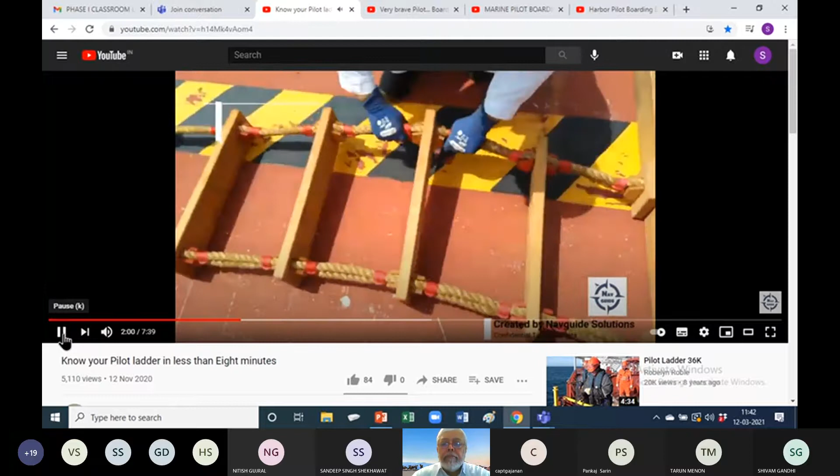Inspect the side ropes and the wedges. There should not be any missing wedges. The side rope should have a firm grip. Make sure it is in order. That's a bad example, should not be like that.

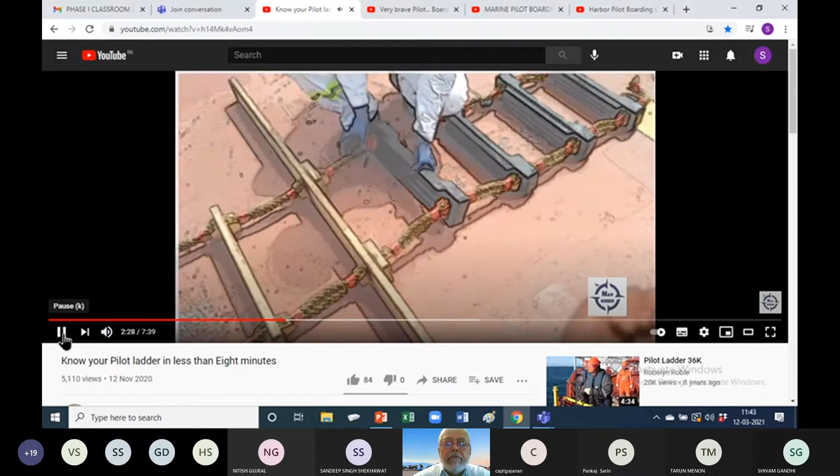Let's inspect the steps now. The steps should be clean. They should not be painted. They should all have a non-slip surface, including the rubber steps. Check the condition of the rubber steps, that they are not cracked. Once again, they should be clean, firmly fixed, and spacing should be even.

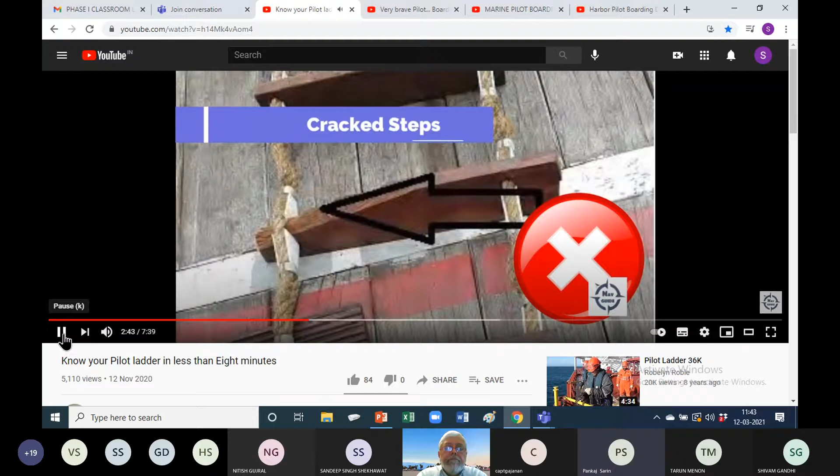Look at that, a broken and cracked step. Make sure you don't have that. That's a very shabby ladder which could come off at any point. Make sure that the side of the ladder is marked with heights along the length. There you can see 6 meters, 5 meters, 4 meters, and so on.

We're going to inspect the spreaders now. Check the condition of the spreaders. There should not be any cracks, they should be firmly fixed, and spacing should be even. Let me show you an example of a very badly fixed spreader that's really dangerous. This is the marking which relates your ladder to the certificate. It should be clearly marked.

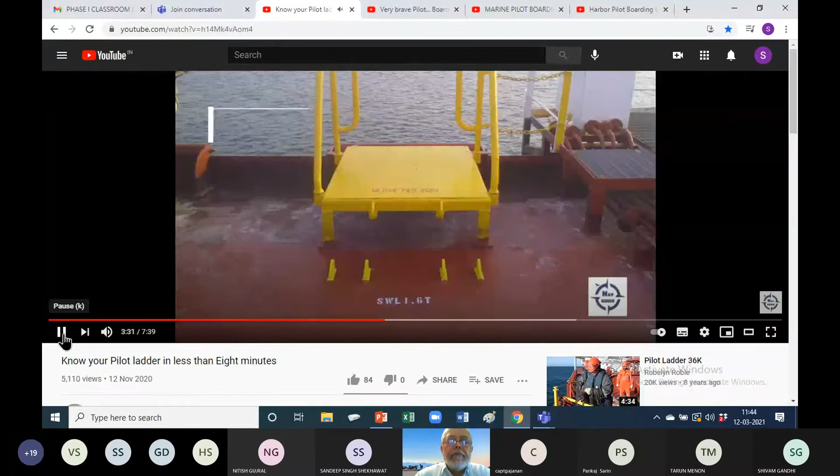The pad eyes on deck should be color coded with SWL, unlike this one which has no markings at all. The pilot access should be firmly marked on deck in clean condition. The duty officer must be checking this, unlike this one. The pilot ladder must be marked with tags for easy identification with your PMS. The length of the ladder should be enough to reach the water line in any condition.

Now that we have finished with the static checks, we are going to go for the rigging of the ladder. Let's rig it up. The rigging of the ladder must be done safely under supervision of a responsible officer.

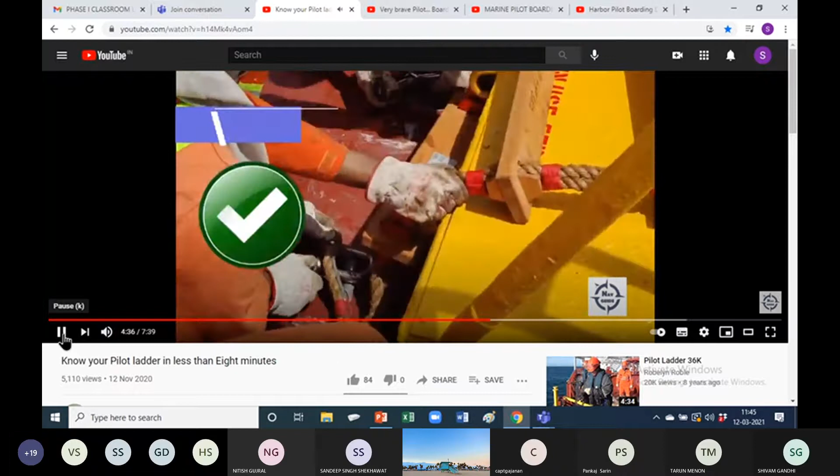The ladder must be made fast on deck firmly using the pad eyes on deck, using strong shackles. There should be a life buoy next to it with a line and a light, but the line should not be connected to the buoy. It should be firmly resting on the ship side with all the steps touching the ship side, and the area should be free of discharges.

Look at that ladder. It's a very poor rigging. None of the steps are touching the ship side.

If there is a tripping line, there's a right way to connect it. It should not be fastened to the bottom part of the ladder below the spreader. It should always be above the spreader level.

The illumination of the area should be adequate, which is usually provided by the deck lights, especially the searchlight on the bridge wings. People rigging should be wearing proper personal protective equipment, including safety harness, life jackets where necessary.

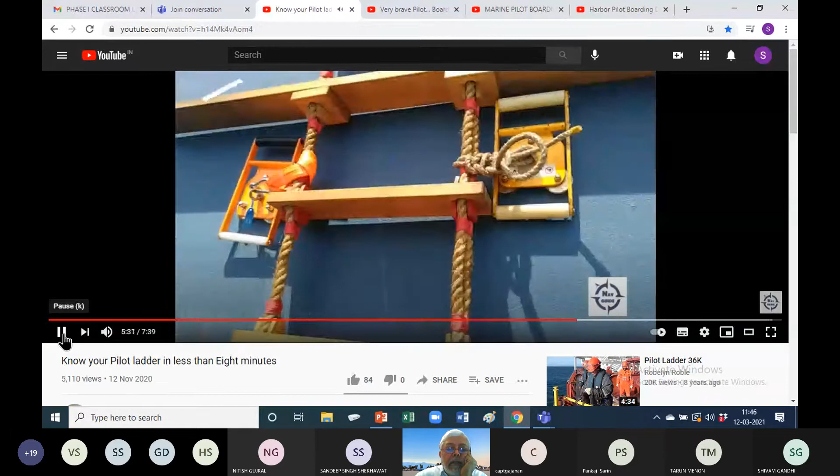The pilot ladder should be firmly fastened to the ship side. You can see there's a magnetic clip over here. There can be other systems to fasten it. That's a very, very wrongly rigged ladder that can come apart any moment.

Now, the height above the waterline must be suited to the pilot's requirements, and it should never be touching the water. The pilot access should be checked by the duty officer after rigging. There should be a safe access for the pilot to come up.

That's an example of a very, very unsafe access. It should not be this way. If you are connecting man ropes as required by the pilots, they should be between 28 to 32 mm Manila ropes only.

Let's go for rigging a combination ladder and see what are the precautions to be taken over there. Now, if the freeboard of the ship is more than 9 meters, a combination ladder must be used. A single pilot ladder should not be used.

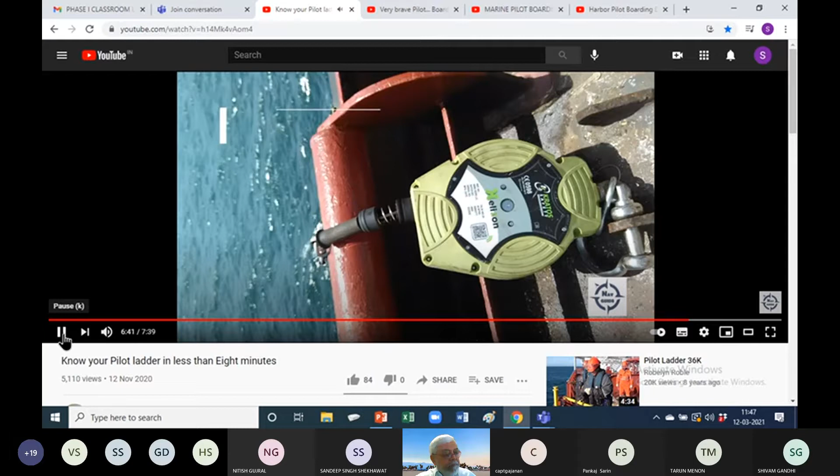Anyone who's involved in rigging of the combination ladder should always be wearing safety harness and life jackets. Proper PPE should be worn. Now, some ships are using a fall preventer device attached with a harness. This is extremely useful and increases the safety.

The pilot's climb is expected to be between 1.5 to 9 meters, not less than 1.5, not more than 9 meters, and the pilot must be escorted to the bridge when he arrives.

So now we'll carry on with a few dramatic videos. One is of a pilot boarding in the rough weather. See the skill and the timing and the danger.

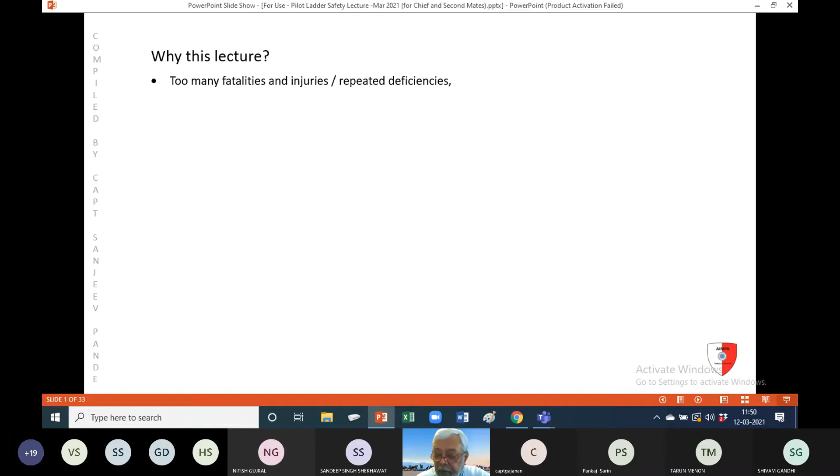So why this lecture? Too many fatalities, injuries, and repeated deficiencies. This isn't just me saying it. A proper survey by the International Maritime Pilots Association over the last 6 to 7 years found the percentage error rate of 20% is way too high.

Each of these errors is a potential fatality. Think of that pyramid of probabilities, where you start with lots and lots of near misses before finally reaching a fatality at the top. But unless you have the near misses, it doesn't start. So this 20% has to come way, way down. It must be wrong, and hence this lecture.

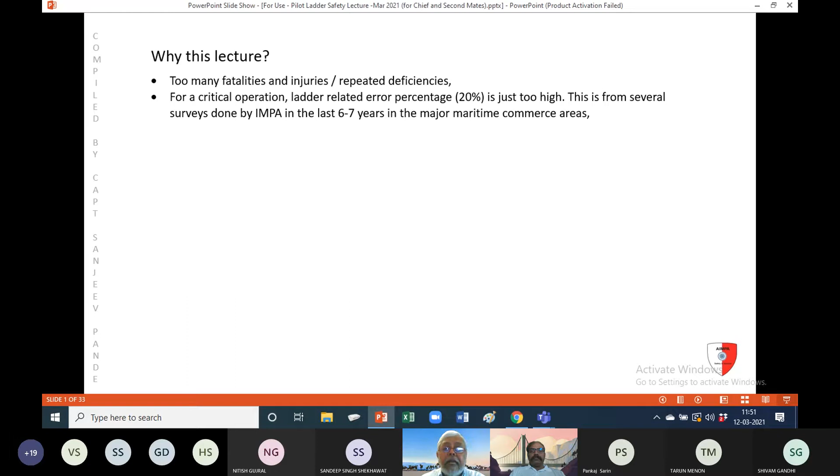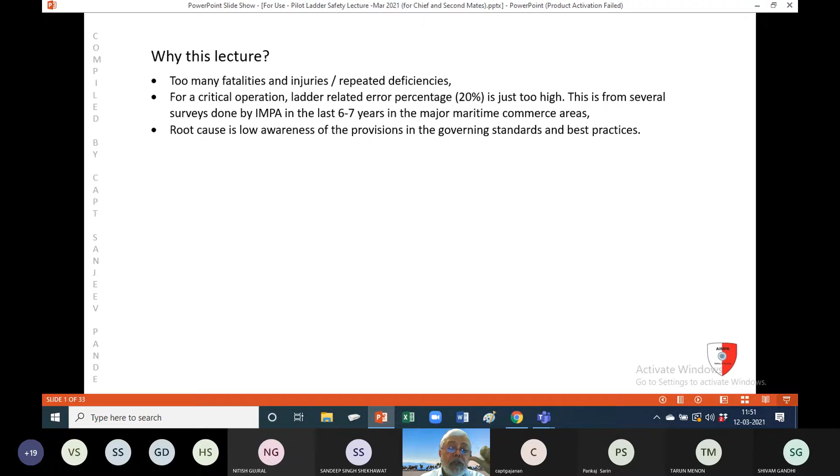Why does this deficiency occur? Because of lack of awareness of the provisions in the governing standards and of best practices. There are some good practices which pilots across the regions have developed, and the purpose of this lecture is to let you know what the best practice currently is.

So we won't talk much about specifications, rules and regulations. We will talk about practical things. First and most important, I feel, is that the ladder should be secured properly. Many methods are being used, creative methods, but only one of them is the good seamanlike method, and that's what we will emphasize in this lecture today.

Second, the ladder may be properly secured, but then it's rigged too low. The logic of seafarers is: if it's too long, we can always use the tripping line and heave it up so the pilot boat doesn't foul with it when it comes underneath. Then when the pilot is about to step on, we just ease the tripping line so he can get on the ladder and start coming up. This saves the bother of really checking and being careful about how long the ladder is.

Just send the bosun, he puts something out over the side and says, yeah, okay, how much? Over 3 meters? You were told 3 meters of water. Yes, yes, 3 meters. Nobody actually checked that, and that's where a lot of problems start. Towards the end of the lecture, I'll show you a video where you'll see exactly what I'm talking about.

People will also be surprised that there are a lot of injuries and mishaps when transferring from a pilot boat to a ship, or vice versa, when the freeboards involved are low, 1.5 meters climb or less. This becomes very tricky because small ships are also quite active and toss around in the waves, as is the pilot boat.

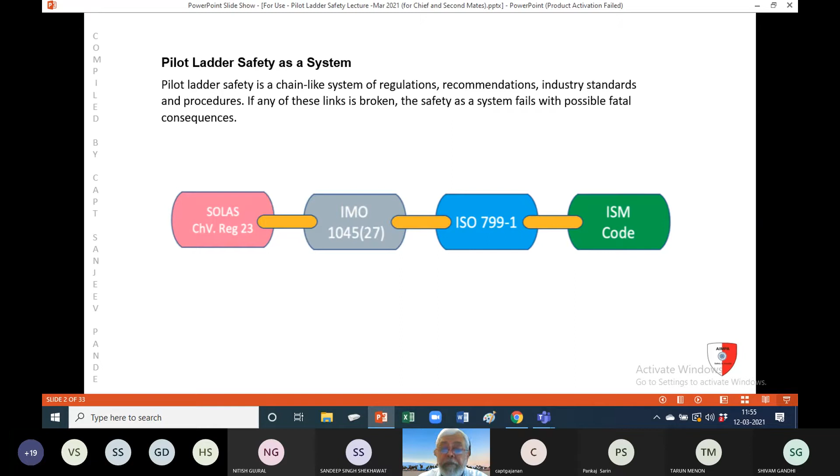So if any part of this is weakened, the system can fail. It's like a chain, as strong as its weakest link. All have to be good, all have to be well known. You must know the regulations, you must use ladders which are properly approved to ISO standard, and you must always follow the procedures and practices prescribed in the ISM code as per our ship's safety management system.

So let's start with the first part, securing the ladder. The pilot ladder specifications say that the top end of the ladder is to end in 2 thimble eyes, and those thimble eyes you attach to the ship's deck. There are strong points using good shackles, and then the rest of the ladder you pay out over the side, and that's it.

But that assumes that the height of the lower step in that kind of full length deployment would meet the requirements of the pilot. But that will be extremely rare and almost never. Most of the time, all the time in fact, you have to ensure that the lower step is at a certain height, suited for your ship's freeboard at the boarding position.

So what we call this length, which is not the full length of the ladder, is called the intermediate length. The regulations don't describe or specify how a ladder is to be secured so that at an intermediate length it is safe.

So intermediate length, just to clarify again, means adjusted length of the ladder so that it meets the desired height above the water of the lowermost step at the ship's current freeboard at the boarding position.

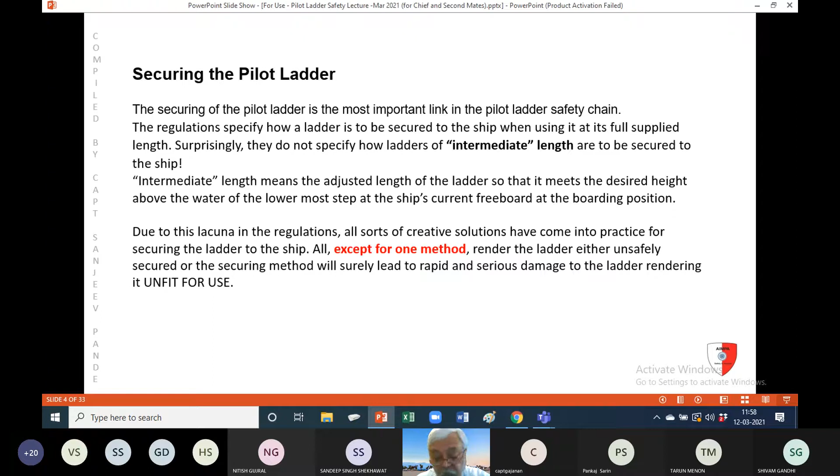And another thing you must bear in mind, because ladders have to be certified and provided by an approved manufacturer, you can no longer carry out repairs on board. They provide you 2 replacement steps, and those too are certified from the same supplier, in an approved manner in which they have to be fitted. And if you have more than 2 replacement steps, you cannot use the ladder. You have to get a new one, or get it repaired, or whatever.

So if you're securing ladders improperly, you will quickly damage them, and you'll quickly run out of ladders. And can you imagine telling the owners, or the charterers, or whoever, why I don't have a pilot ladder? Because I didn't rig it properly, it got damaged, and now I don't have one, send it please by helicopter.

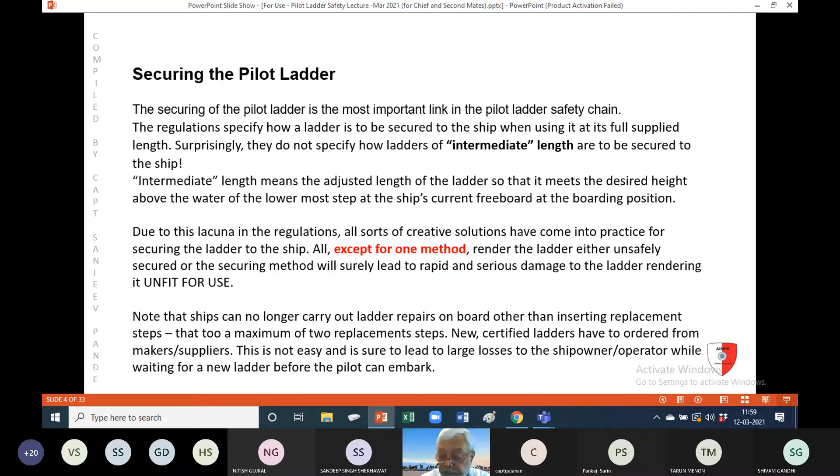So let's see what these bad practices are. One we're talking about is these tongues, they call them tongues, or some people call them brackets. This kind of bracket is a quick, handy thing. Quick, looks very nice, but this is not an approved thing. Some fitter has dug out his brains and done this practice, and it spread like wildfire all across a lot of ships all over the world.

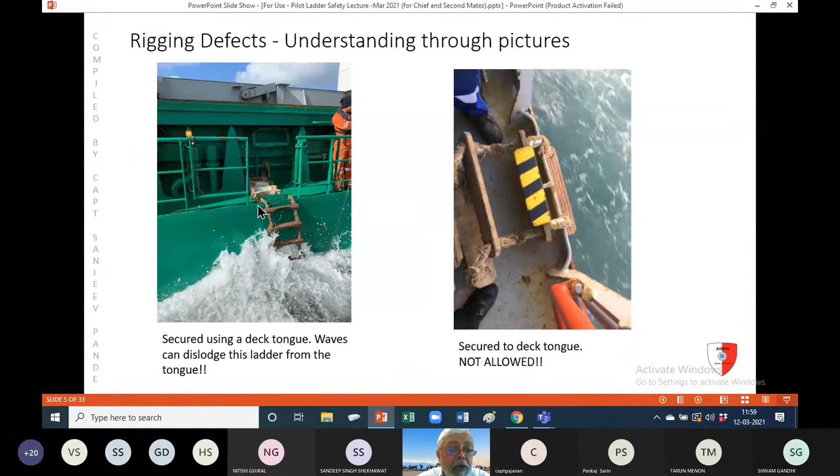So this is wrong. This puts the strain on the wooden step and onto the fixtures. This is not correct. It will damage the ladder. Here it is hooked on. One wave will come, it will take it off, unhook it, and next thing you know, there is nothing tying the ladder. It is not secure.

Here, the ladder is secured to the ship's railing. The railing is not a designated strong point, it is a weak structure. This is not right. Never secure to railings. Secure only to designated strong points.

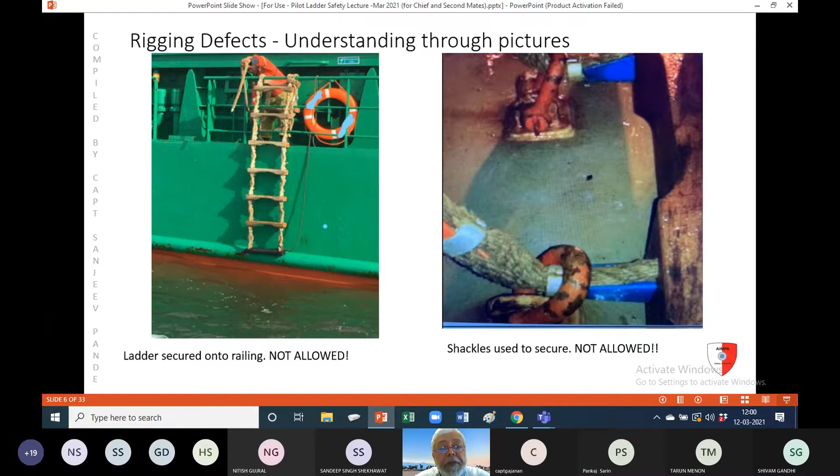Well, over here they use the strong point, but then they use shackles. Shackles are not good practice, not to be used, avoid. When you go on board your ship next time, if you see this being done, throw it out. You see, when the strain comes on the ladder, you'll find that it gets clamped and the rope will get damaged, and next time you won't be able to use the ladder. If you inspect it before every use, you'll find that a lot of damage has taken place.

Here we have another clever, extra smart way of securing the ladder, to provide a firm and flat footing for the pilot to step on when he comes on board. They got this collapsible platform.

But then they use the same thing to secure the ladder. See the next picture on the right. When the pilot said lift up this, he asked them to lift it up, and asked where the ladder is secured. It's just being jammed by the two drop nose pins, locking pins. That's all - the lid is put off, the locking pins put in, and the ladder is jammed underneath that. Not correct. Unsafe.

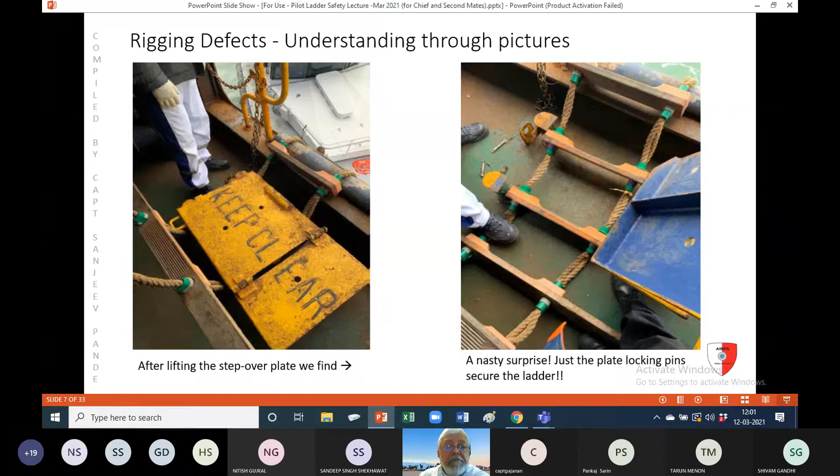Here, left hand side, they're using a crossbar. Again, the weight is coming on the step and the fixtures, not on the side ropes. Not safe, not allowed. Why? It will damage the ladder, and then you'll have a ladder which is not fit for use.

The right hand one is - well, they have jammed the spreader against the ship's railing, thinking that is enough. Obviously very wrong. As an extra measure they put 2 shackles, but that also is wrong.

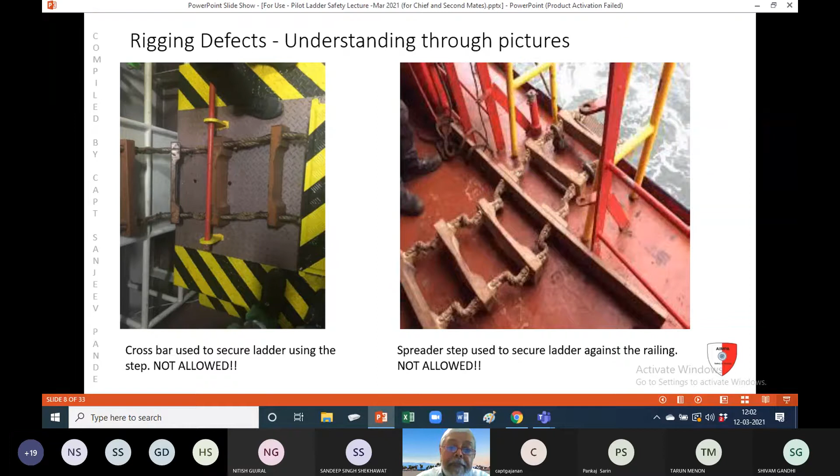So then what's the right way? The right way for securing ladder intermediate lengths is a very simple rolling hitch method. Based on best practice, it takes into consideration the fact that the design and construction of the ladder makes the side ropes the primary weight-bearing part. So you should understand that the side ropes are the ones supposed to take all the weight forces, because the side ropes are made of rope with a minimum breaking load of at least 24 kilonewtons, roughly 2.4 tons.

Whereas the steps with the fixtures - the chocks with seizing or clamps, whatever - are tested to a proof load of just 8.8 kilonewtons, about 900 kilos. The pilot doesn't weigh 900 kilos, he weighs 90 kilos, but there are impulse forces, hammer forces, jhatkas. So 900 kilos is applied just for safety. But that's not enough, that can cause damage. Where is 2.4 tons and where is 900 kg?

So the rolling hitch method secures to the ship's deck on strong points in such a way that all forces are transferred fully to the strongest part, that is the side ropes. In this way, the steps, spreaders, or chocks are never used to bear the weight force exerted, since they're not designed for this.

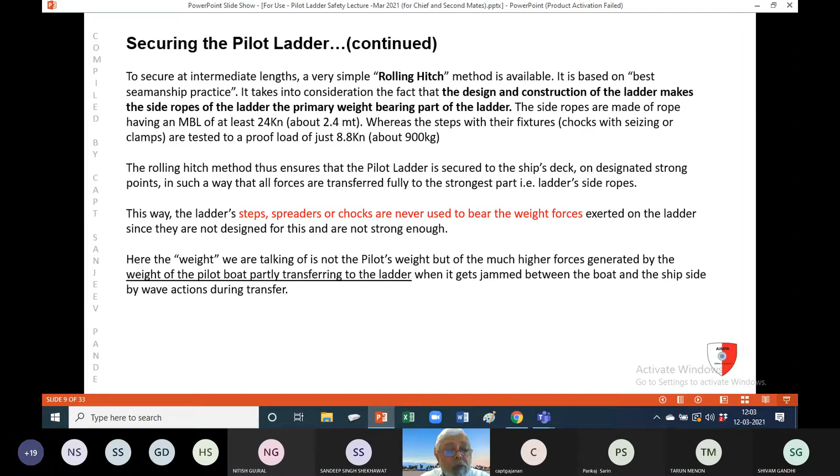And here, what do we mean by weight? Not the pilot's weight, which is hardly 90 kilos, but the much higher forces generated by the weight of the pilot boat, partly transferring to the ladder, when the ladder is jammed between the boat and the ship side in wave action. We'll see it in more clear terms with a few sketches.

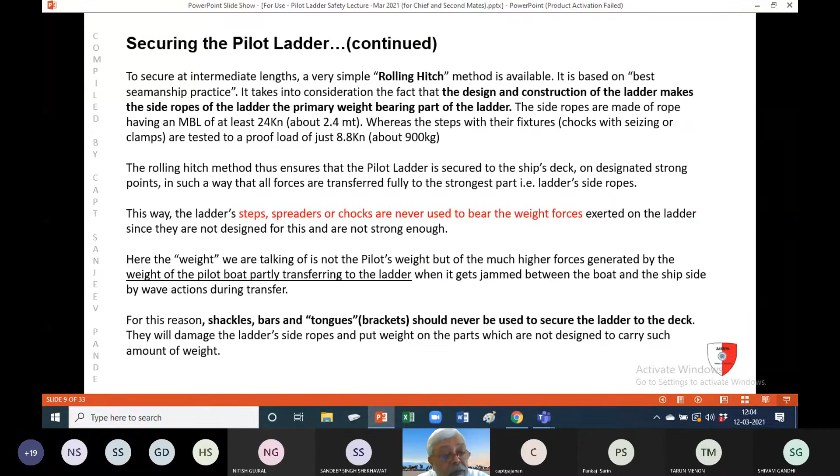That's why all the other methods like shackles, bars, tongues should never be used - they will damage your ladder. And when you have a damaged ladder, you're not supposed to deploy it. You're supposed to condemn it and put a new ladder from your stores, and answer your owners why you keep on buying ladders every 3 months.

Here is the rolling hitch method. I will show you a picture, but what is it? This is the best practice we are recommending: you have 2 dedicated strops of the same size of rope as the side ropes, MBL 24 kilonewtons. If you put them on shackles, also keep them dedicated, and your thimble eye is made. So it just becomes a matter of shackling those strops on one end to the deck at the designated points, and the other end you roll hitch onto the side ropes.

And when the ladder has been put in storage, so can these strops, and be saved from weather damage. You can have certificates to back them up - that's what is going to come very soon. Your ladder certified, and what about your securing ropes? They should not be the weak link, they should all be certified, so must the shackles, and so on. Paper trail is very important.

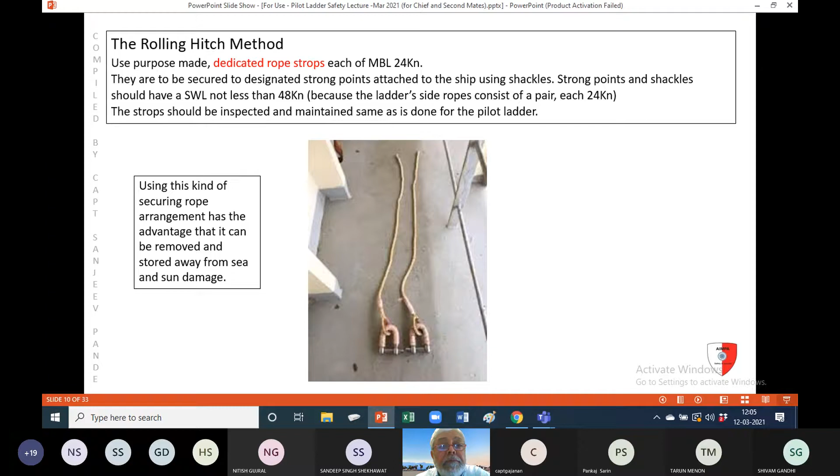Obviously, you must have them at equal length. Otherwise, if your securing rope is long and short, you'll have a slanted ladder. Not good. The steps have to be parallel and level.

Very simple to make the hitch. One, two, three, four, the steps are there. You learn it within half a minute. Practice, and within half a minute you know how to do it. Left hand, right hand, you'll know how to do it.

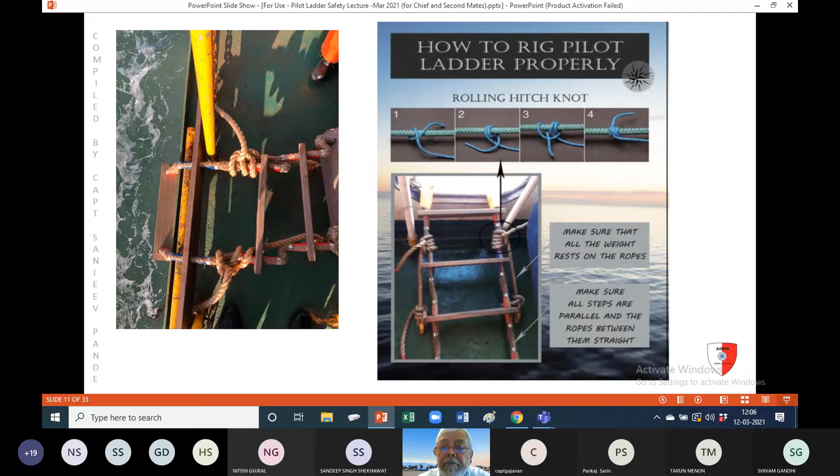So here we are going to talk about the next part, securing the ladder to the correct height. If it's a bit shorter, it's not an issue. The pilot doesn't actually use the lowermost step to step on. He uses the one above, or maybe one more further above that. Okay, mostly the one above.

And when the boat is up and down, jumping, he maybe uses the second one above. So if it's slightly short, doesn't matter. But if it's long, it can make problems. A little bit long maybe a problem, okay, but too long, it will cause lots of problems.

of the one jhatka of the pilot boat. You'll have one or two steps which are wrenched loose. And the next time the ladder won't be usable because you can't repair it on board. Those fixtures, this is no longer allowed. You cannot do the seizing, you cannot do clamping. You have to replace the ladder.

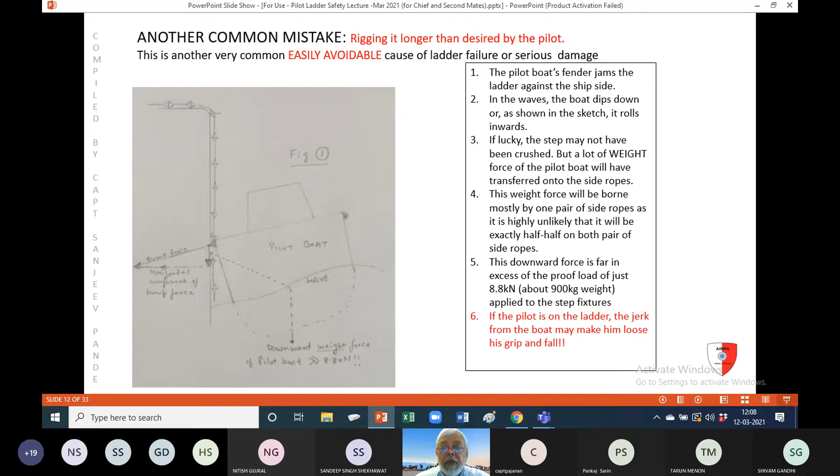The pilot may have climbed up, but then after that your ladder has become useless for further use very soon. If you're lucky, maybe a little bit, but if you do it very often, you're going to run out of ladders.

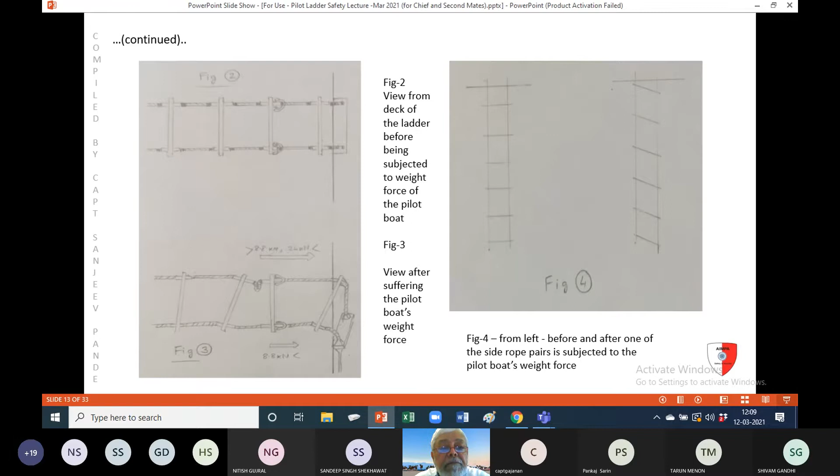12 meters height of access point above waterline. Height desired by the pilot is 4 meters above water. So the length of ladder deployed is 8 meters. From the ship side, at that point you measure downward 8 meters — that's where the lower step should end. Below that, you'll have a gap of 4 meters. If you make a calculated rigging, then you're right. Don't make a visual estimate, you'll always go wrong. Typically this has to be done by the officer.

The crew, if you're smart and you've taught them, you might show them once or twice, and if they've practiced they come up with good, proper results. You can check it, and then tell them they know how to do it. Otherwise, it's the responsible officer's duty to make the calculations and ensure it's at the correct length.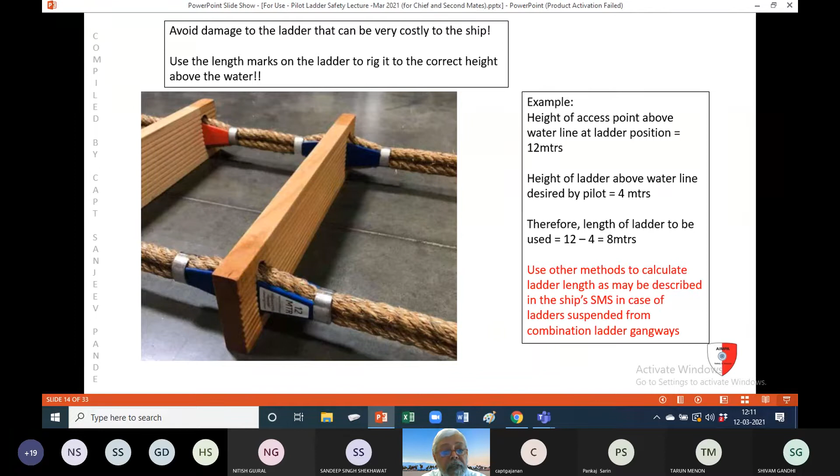Where's the pilot? Maybe in the water, we don't know.

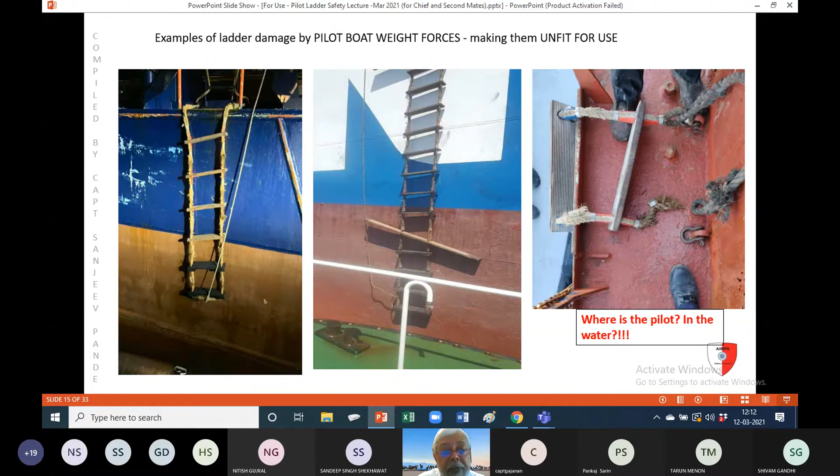Let's go on now to low freeboards. In this picture, there's an actual investigation into an incident where a pilot died, a London pilot. This is a launch — you can superimpose it on the ship from which he was stepping off after finishing his pilotage. You can see how there's just 800 millimeters clearance between the deck of the boat and the lip of the deck of the ship. 800 mm, that's about 2 feet, and that's quite a lot to jump off.

The pilot tried to do that, and he tripped and fell. What should have been done? The investigation found that the ladder shown on the right, the pilot ladder superimposed by animation, is how it should have been rigged.

With a bulwark ladder, of course, to step up, he has to climb up, and he has 2 stanchions to hold on to. While holding the stanchions, he steps down like a normal pilot ladder, until finally he watches the boat and times his jump and gets off. He doesn't just simply try to step off with nothing to hold. When you're stepping off with nothing to hold, your hands are free, your legs are free — basically you have no contact. Whereas the other way, you've got 3-point contact before you finally transfer from ship to boat, or vice versa.

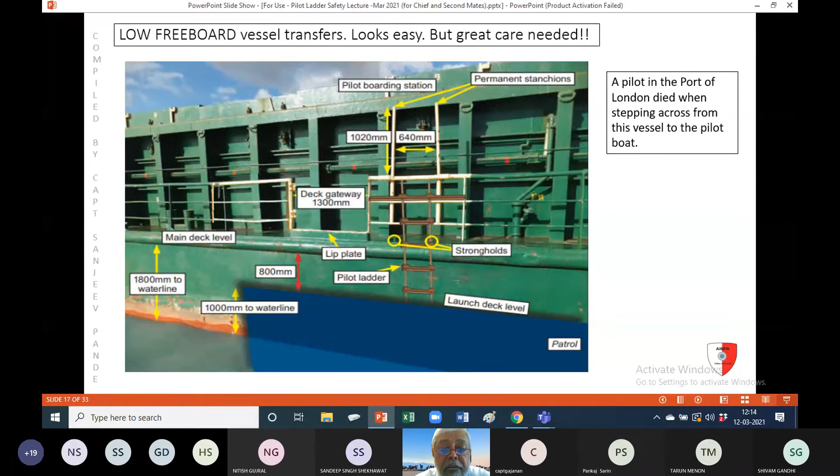Here's another case, low freeboard. It looks easy, what's happening, but I've done this many times and you'll find it's difficult. You've got no man ropes, nothing to keep your balance. Your arms are at your center of gravity, your hands, and it's very risky. You have to be a real supple, strong athlete to do this. Not good.

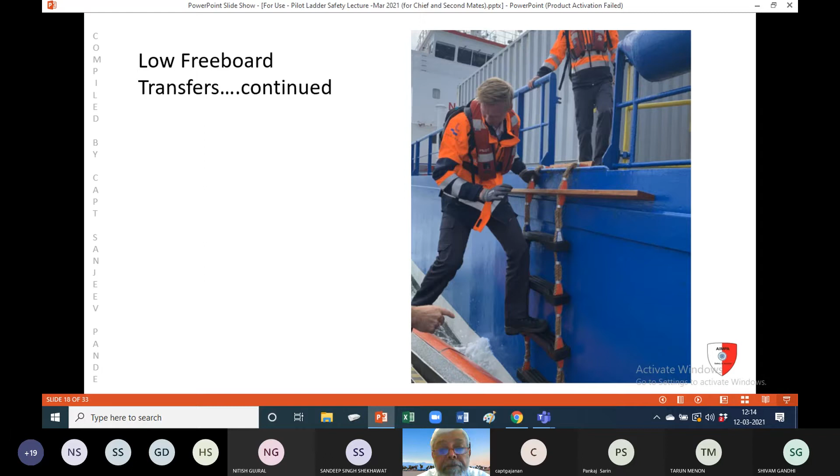There is no solution here, but you have to be careful. Now, before we go on to combination ladders, you must understand this height above water: the climb. Do we have to consider the climb, or something else?

Climbing is tiring, yes. But if you fall from a certain height, beyond a certain height, it's lethal. So it is the height of the fall, the expected fall, the maximum height from which the pilot can be expected to fall. That is the governing factor when deciding whether to rig a plain ladder or a combination ladder.

The table says even a fall from a height of 1 meter, by the time you hit the ground, you are at 16 kilometers per hour. The skull will crack even at that speed. Go further down to 9 meters height, and you reach 48 kilometers per hour. That's very high speed. Falling at that speed onto water is like landing on concrete. There's no difference between concrete and water.

So it is the fall, not the climb or the height of the access point, that matters. We will talk about this further in later slides, but it is the fall, the potential height from which you can fall, that governs combination ladders.

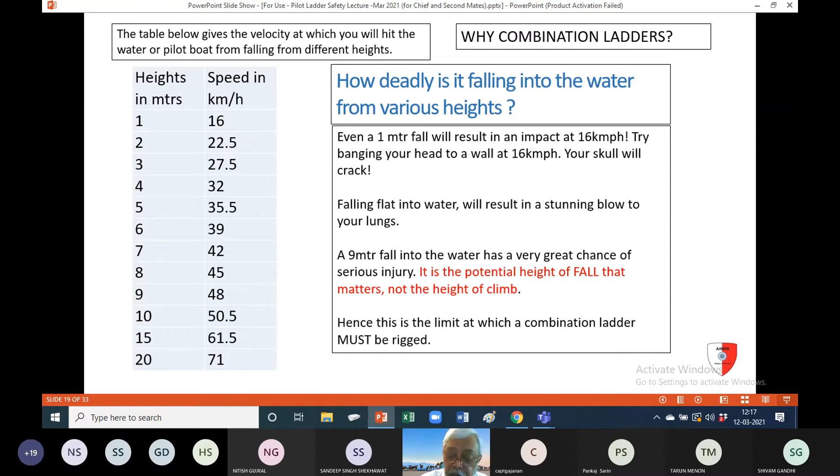So with the combination ladder, two things can happen when the ship rolls: the gangway part can swing away from the ship side and hammer back, and the pilot ladder can also swing like a rope and move around. Two independently moving things is very dangerous, so both have to be secured, not to each other.

There's a wrong practice that developed where people just lash the lower platform to the pilot ladder itself, thinking both are secured. No, that doesn't work. If they move together, is there no problem for the pilot? No, it's very dangerous. The whole contraption will move back and forth away from the ship side, and the pilot can get shaken off and fall.

So it has to be individually secured. The pilot ladder has to be secured to the ship side, and separately the lower platform also should be secured to the ship side.

The center picture shows good rigging except for the tripping line, which is leading aft. This is not correct; it should lead forward. Leading aft, when the pilot boat is approaching, something will get caught on the pilot boat. Leading forward, this danger is not there.

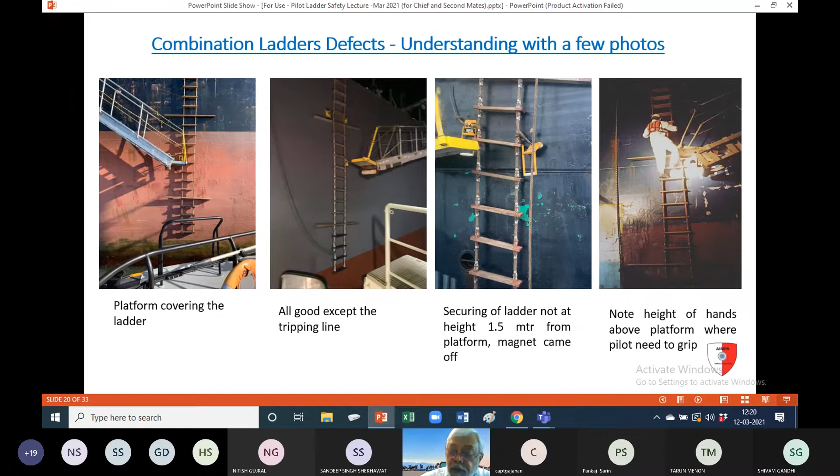Here they are shown using magnets. Some ships have special sockets designed, recessed into the ship, which are also good. In fact, in the third picture you can see there is one socket already, but that socket is not used because the draft or height of water is not suited for it. Here are some good examples, as per the IMO poster.

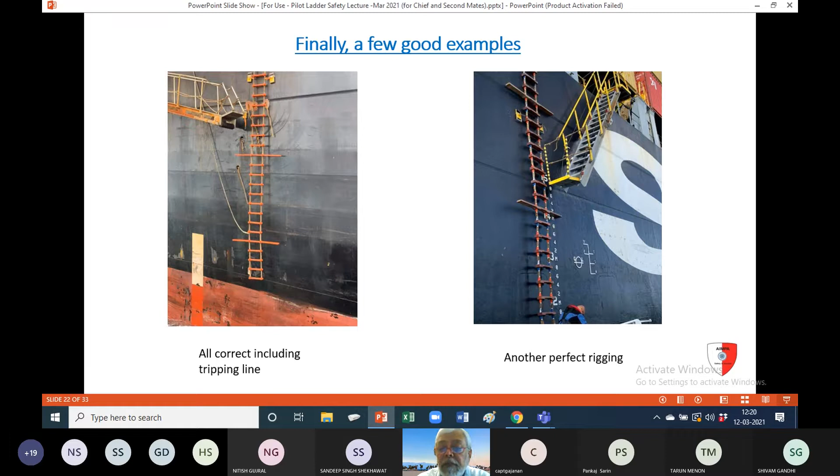The right hand picture shows the gangway looking very steep, but that might just be the aspect of the photograph. You must watch the inclinometer, as shown in the video. At 45 degrees, no, you cannot use it. You have to adjust the position of the pilot ladder by shifting it further aft so that the gangway can be hoisted more and the angle is less, below 45 degrees.

Then we have another thing about pilot ladder winch reels. Here the main consideration is the winch reel should not be bearing the weight of the ladder. It should be a strong point on the deck of the ship.

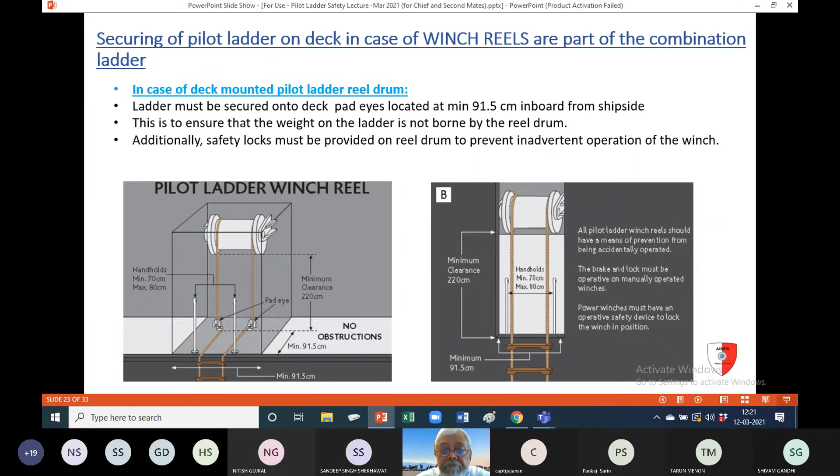Here in the picture, they secured the ladder directly to the ship's deck, but used shackles instead of the dedicated straps I showed earlier. In the right hand picture, they've just reeved the pilot ladder rope through one eye and it's gone straight to the winch. It's taut and the winch is taking the weight, which is wrong. Here also they should have put dedicated straps onto this strong point and applied rolling hitches.

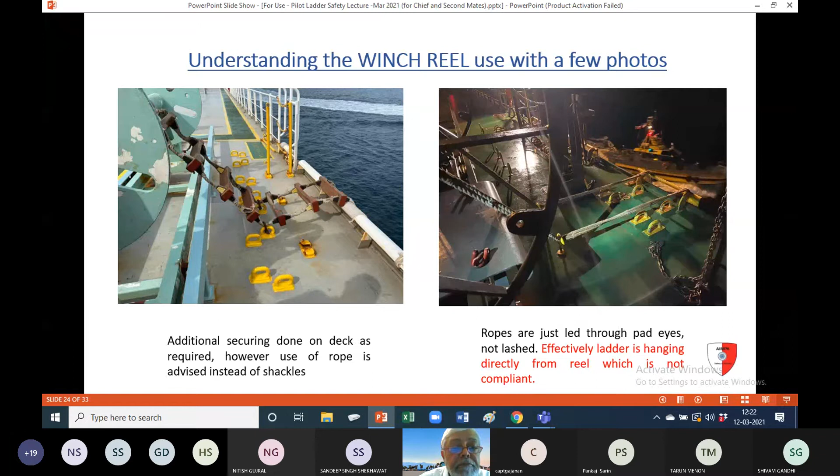We have another innovation called the hull door. Those are on very large ships, or ships where it's awkward to have a pilot ladder winch arrangement installed on deck, especially container ships, because deck space is a very precious cargo area and a lot of bays of containers can be used up for this kind of arrangement. So they make a hull door, which is very clean and neat for cargo storage on top. Large freeboard ships, like car carriers, also have this hull door arrangement.

Same thing, like on the right hand side, they have a winch, but the ladder must be secured to the deck and no weight should come onto the winch. Whatever winch you're using, remember these winches can be prone to being misused at the wrong time through inadvertent use, so they have to be safety locked. Power winches especially have to be engaged or safety locked. Even mechanical winches used to have extra locking, and bottle screws or turnbuckles are used to lash it.

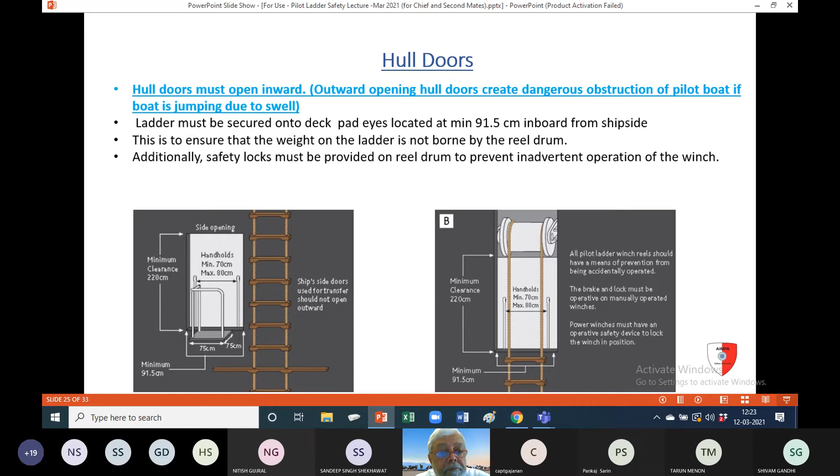Here is a photograph of such an arrangement. It looks fine, except that the pilot ladder needs to be secured to the ship's side. Otherwise it rolls around, hangs out, and swings in the rolling, and they have secured it only on one side rope, which is not good. As the pilot comes up and tries to cross over to the platform, the ladder is going to twist, and he can have a tough time getting on board.

Whenever these extra complications arise, that is where a mishap can occur. It should be one smooth climb, hand over hand, quickly up. It's something like trying to use a staircase - if one step is uneven, people trip and fall over that. If one part is twisting, one step is slanting, something is thick, something is slippery, all these complications make the pilot very careful and gingerly. That means great danger.

So there's a question here: how will you calculate the length of the ladder to be deployed in this arrangement? Freeboard is measured from where? Do you take it from the deck above, or from the deck of the door? These ships can be very, very high, and even the door can go very high, so what do you do? And when loaded, the door can be too low, very close to the water level. Very complicated. Then they make these innovations but don't think it through, and you end up with a lot of difficulties. They say someone will manage - no, it should not be that way.

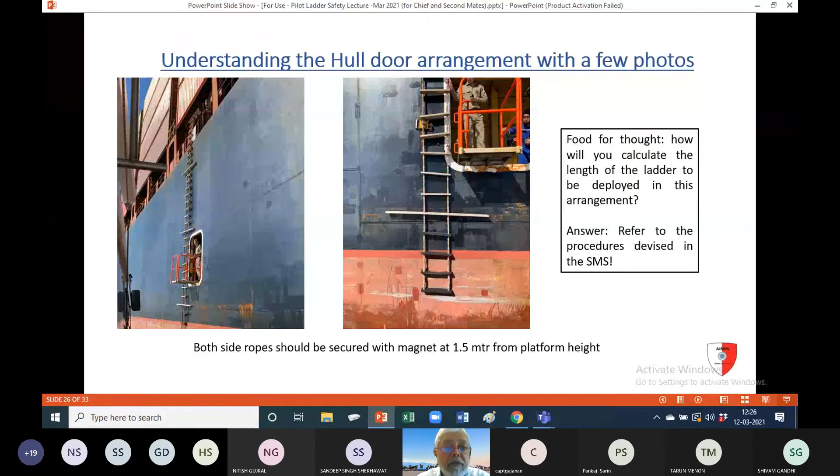Trapdoors - the word trapdoor really means you're trapped at a certain stage. Neither can you go down, you have to go up only and take your chances.

Essentially, what happens is the pilot climbs up, and then from using the grip on the side ropes, he has to shift his grip through some sort of metal angle bar. You can see it's very thick - how can you get your hand hold on to this? No hand can grip such a large thing. Then you have a horizontal pipe here and here. These are very slippery and round, and they don't give good grip. If you hang on the horizontal bar you have no strength, but hang on to a rope and you get tremendous grip. Try it - hang on to a rope this way and hang on to a bar that way, and see how much weight you can bear. Your fingers will just slip over this bar. So this is the problem.

The solution should be that the ladder continues further up for a certain distance, and then the pilot should be able to go, like they've shown here. They made a U-shaped frame, and the ladder hangs on to that. So here you can climb up and continue gripping the ladder. So the pilot is smiling.

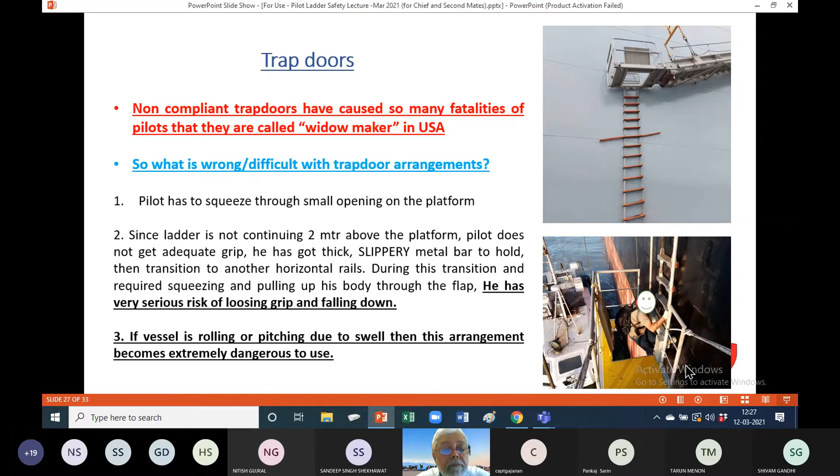Another good arrangement here - same thing from a different view. A nice U-frame: he climbs up, gets a pilot ladder to grip, and goes on board. In more detail, as you can see from the lower platform, at 1.5 meters on this side, they secure the ladder. Very nice.

But some ships don't have this kind of design, so they have to alter it. There are 2012 amendments - SOLAS has come in from 2012 with a cutoff date by which they have to make these changes, at the next survey or special survey, whatever repairs are needed. It's quite complicated, who does what and by when, but trapdoors have to be made this way, and defective ones have to be changed to this. So if you find a ship having defective trapdoors, you as chief officer should raise a defect item on the defect list and get it repaired.

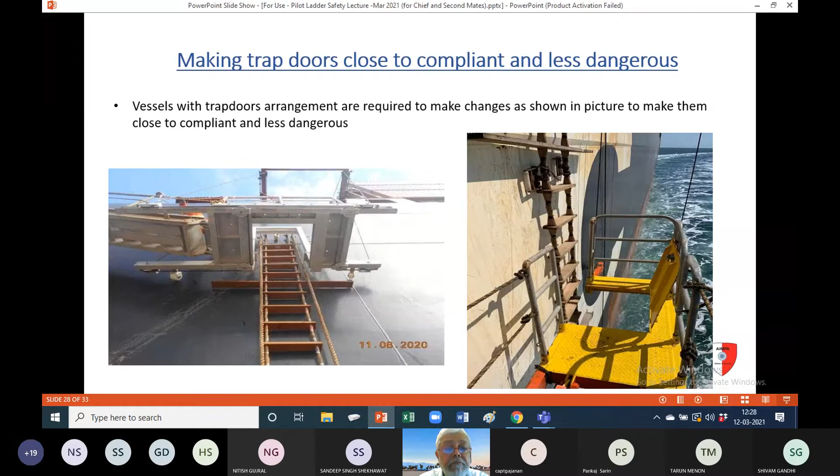Now we come to other associated equipment. Man ropes are to be rigged only if requested. After rigging them, it doesn't mean you have to hang them over the side - they have to be deployed only when the pilot asks. Sometimes as a precaution we prepare the man ropes in advance so that at the last minute you're not running around, but we don't deploy them. Deploy them only when the pilot says the seas are rough and he really requires something more to hold on to before he can go onto the pilot ladder.

Man ropes are sometimes needed - literally a little bit like Tarzan, you have to go across. And they're mostly used for disembarking.

As for the bulwark ladder, the stanchions must not be part and parcel of it - they have to be a separate piece of equipment. The bulwark ladder is separate and the stanchions are separate. The stanchions must extend 1.2 meters above the top of the bulwark or bulwark ladder, so that there is sufficient height for the pilot to climb up before he can cross over from the ladder onto the deck.

So the question is: what should be the length of ladder you require, and from where do you count the length - from the top of the bulwark, or from the deck at the freeboard boarding point? It should be from the top of the bulwark, because the pilot will have to climb up to the top, and if he were to lose his footing, he will fall from the top of the bulwark, not from the deck, which is one meter further below. That is the way you should calculate the height to decide whether it should be a plain ladder or a combination.

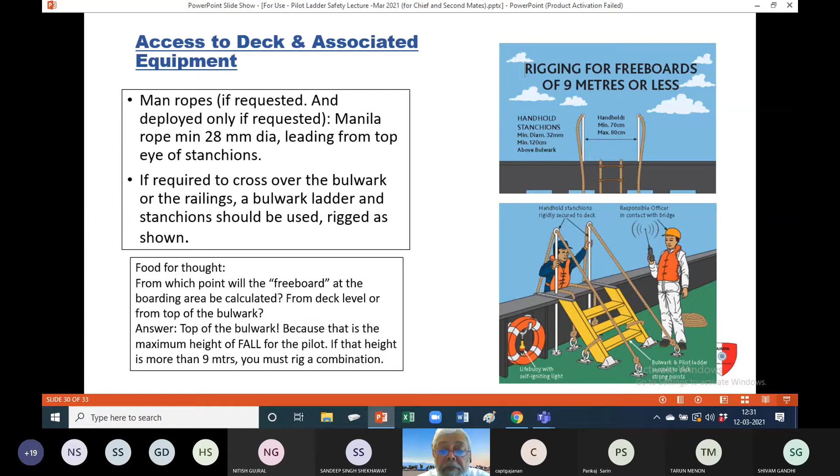Safe approach. The fenders, permanent fenders, well, they serve a purpose for the regular use of the ship. They have some strength aspects and also some areas where they are required to avoid repeated damage to the ship's side. So they have the permanent fenders.

But then they have to be made properly, not like on the right-hand side. When the pilot boat approaches in a sea with waves, these fenders are known to jam the pilot boat's bulwark fendering, and when the ship rises or the boat moves, it pushes so hard that the pilot boat capsizes or gets seriously damaged, crushed. The edge gets crushed. Not good at all.

And a heavy, jarring shock - people on deck can be shaken from their footing and fall in the water. Very dangerous. So 6 meters clearance, that much is the minimum required, so that the boat coxswain can be confident that he will manage to keep the pilot safe and the boat safe while the transfer is going on.

Again, if you find this kind of situation, you must have it fixed. Don't just say, oh, it's been there for such a long time, so it must be okay. No. Now you know whether the 6 meters is there or not, you must get it fixed. Send a defect. Raise a defect.

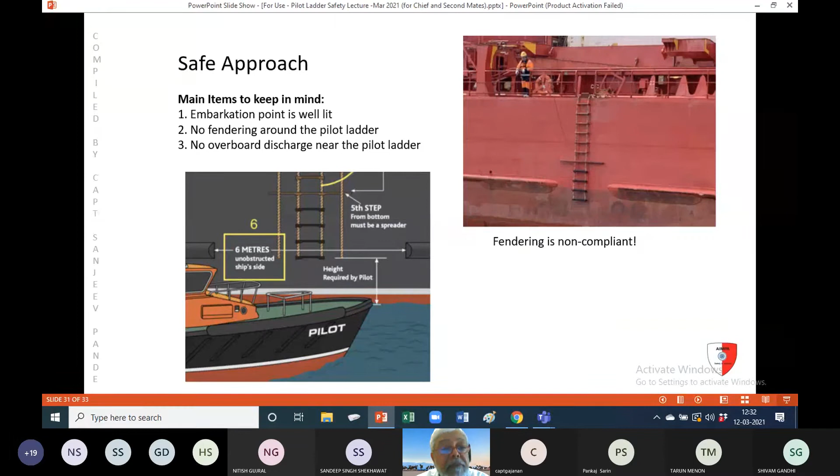A little bit about the tripping line. We've already seen why you should lead it forward, and as far as possible, avoid using it. The tripping line is not meant for picking up the extra length of ladder you put out. That's not the purpose. The purpose of the tripping line is once the use is over, you secure the ladder to pick it up back on deck. That's all it is. You're not supposed to adjust the height of the lowermost step for boarding using a tripping line. That is bad practice.

It is far, far too common. First thing you do when you go on board, you get your tripping lines corrected and tell the crew they're not supposed to use it that way - it's only for picking it up after the pilot has boarded.

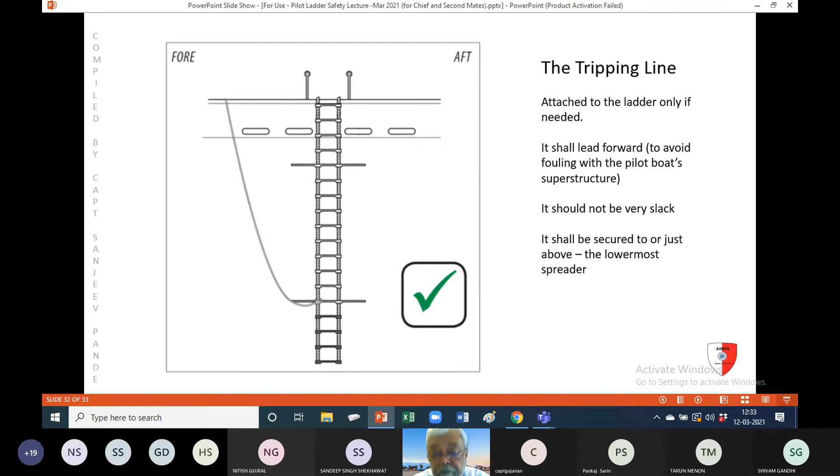Well, I was going to show you one more video, then we'll talk about question and answers from the base of the video.